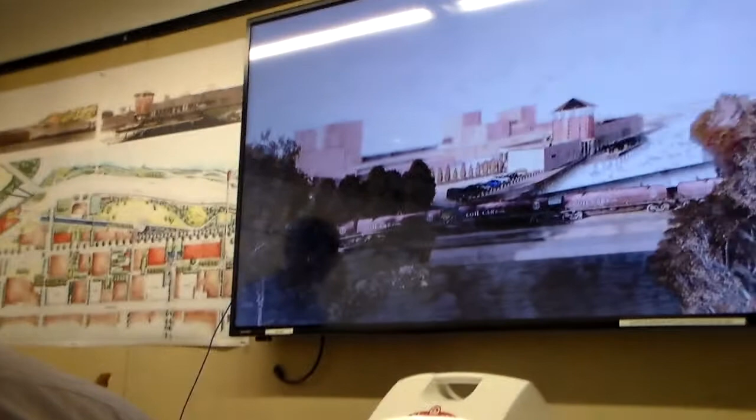I also wanted to take all of the information I had gathered by talking with brewery owners and visiting breweries, and I inquired about things like their spatial needs, their wants, and especially their regrets. I wanted to turn that into a program that would facilitate fluid operation.

I also have another driving factor, and that is the community of the brewing. If I had learned anything during all of my research trips to breweries, it is that the community comes out of its shell at breweries. So I wanted to design a space that allowed for active engagement for those that are visiting the brewery and also those that might just be passing through.

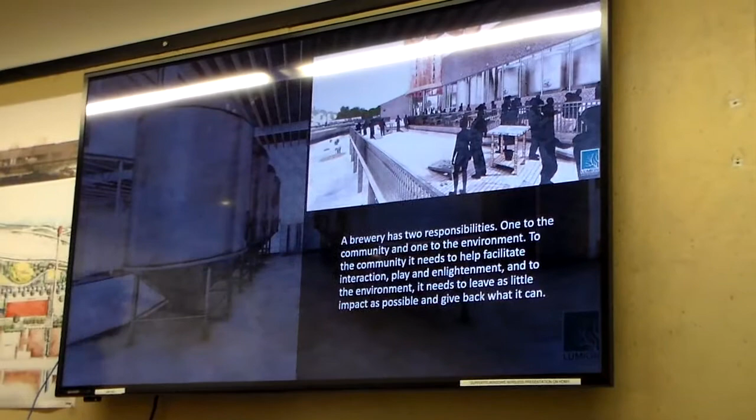To me, a brewery has 2 responsibilities. One is to the community and one is to the environment. To the community, it needs to help facilitate interaction, play, and enlightenment. And to the environment, it needs to leave as little impact as possible and give back what it can.

So a brewery is a destination, a point of interest. It's connected to the urban context of its surroundings. It's a perfect location to educate people on the intersection of agriculture, water, biology, and energy.

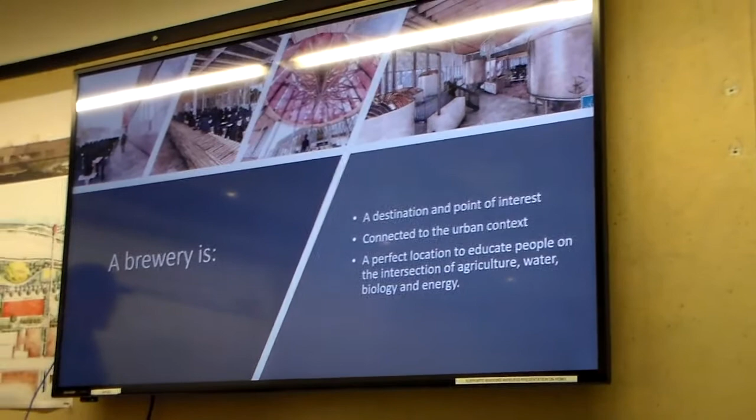Lynchburg, where my brewery is located, is up and coming. The waterfront is an extremely active place. The population is increasing in the area, the number of businesses are increasing in the area, and people are always looking for the new thing to keep them in the city a little bit longer.

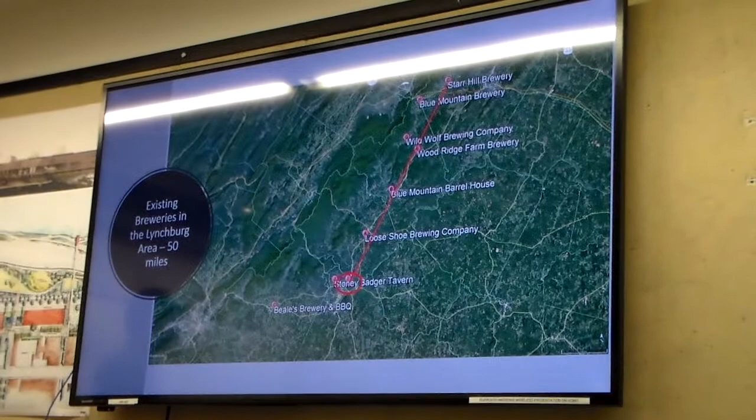Lynchburg right now has no breweries. The best breweries are about 35 to 40 miles away from Lynchburg, whereas an hour and 15 minutes away in Charlottesville, they have a 6.5 mile radius. So being a smaller city, with a residential area here and the downtown area there, my site in the red block is definitely prime for a brewery.

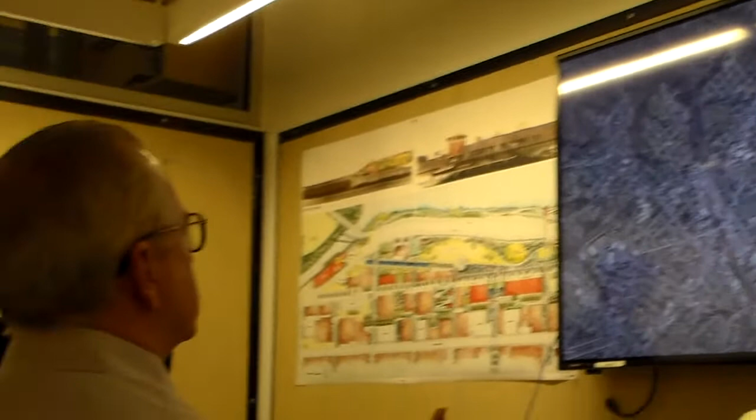And this is its downtown area as opposed to center city, just to show how walkable the city is. So my site is located in the northwest corner of Lynchburg.

It is at the very end of a larger master plan that is being developed right now, designed by Nelson Byrd Woltz. The master plan includes everything from 9th Street over. This is 9th Street, so this is the street you would take to get to the brewery. You can see that the master plan also includes the restoration of a lot of nearby buildings, all red brick, punched windows, being restored to their former glory.

This is one of the staples of the downtown area. This is the Depot Grill, and right now it is the only place that you can go for a decent selection of beers.

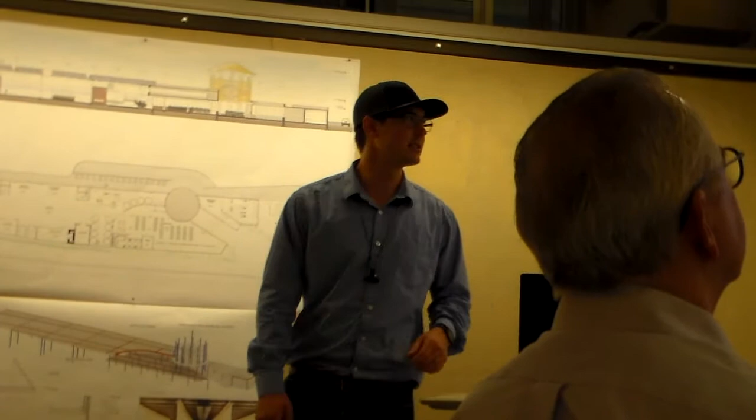So this is the master plan. As you can see, it's very similar. I added on to it with my brewery and the other portions of the city that they didn't include.

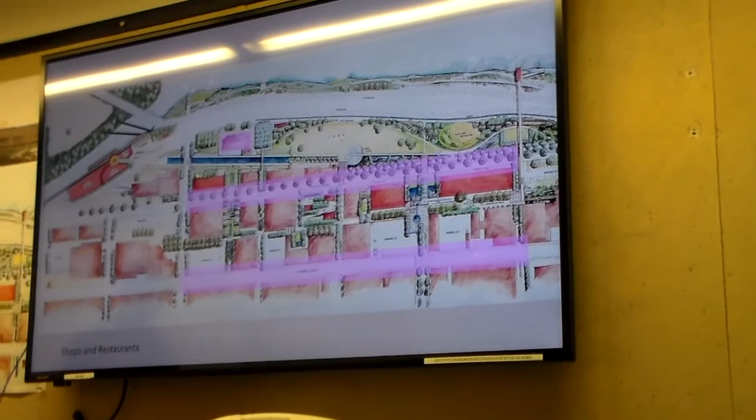Since the master plan has been implemented, right now Jefferson Street is loaded with shops, cafes, and restaurants. Same thing with Commerce Street, a lot of mom and pop shops and restaurants. The economic generation is seen through the amount of new businesses that are actually flooding into those areas.

Another major aspect of the new master plan are the trails. The trail along the top here on the site plan is an existing trail. It's really a walk, the James River Walk, and it goes down. There's an island over on the other side here that continues it.

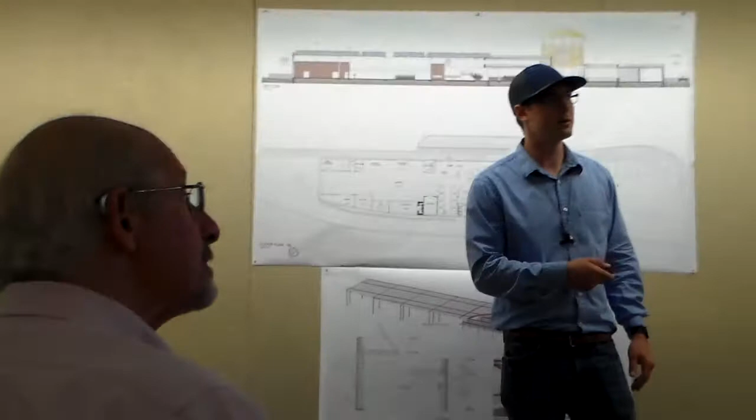But they added on to it, things like this sky bridge that I don't know if it'll be implemented or not, but they added the sky bridge, crossings and everything. What I wanted to do was continue that walk and merge the James River Trail along with the Blackwater Creek Trail, so my site becomes a conduit between those 2 trails. Instead of ending at Lynchburg, it allows you to continue on through and wrap around Lynchburg as well.

Then there's a lot of avenues that they're opening up with this master plan. It's a very hilly city, so these avenues have a lot of stairs, overlooks, the whole nine. It's really turned into something beautiful.

So I'm going to dive into the brewery. Given the language of the buildings in Lynchburg, with the red brick, very basic materials, punch windows, and stuff like that, I wanted to stick with and speak to the context of their materiality.

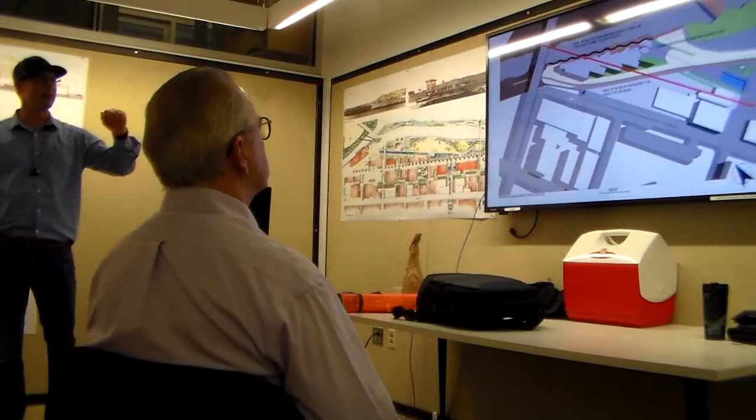And I have from the very beginning. This is a very early concept that I had. It is quite different from what you see today. Its main driving factors were, of course, that main run right here through this master plan, as well as the water's edge, giving it a little more organic shape on the water's edge side, and then a more geometric, in line with the city look on the front.

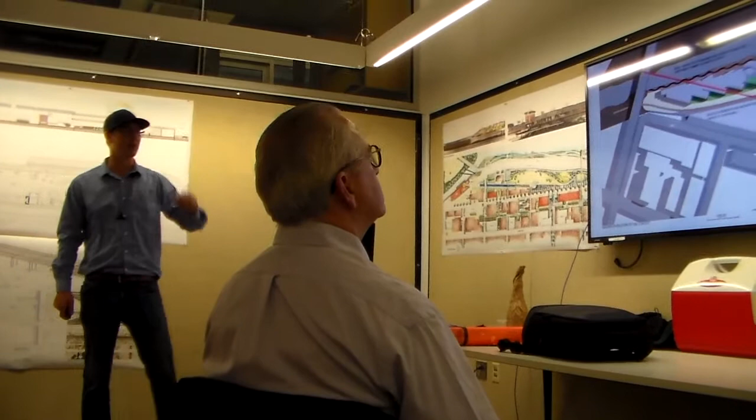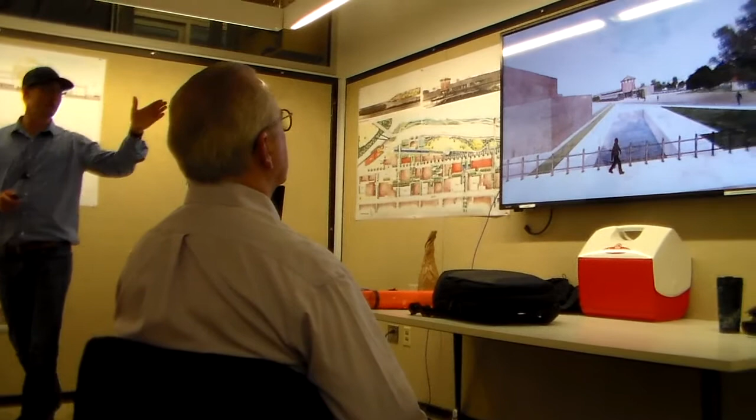And then it developed over the last quarter into what we see pretty much today, except for the terminus feature, which is completely changed. The program on the inside is exactly the same as last quarter, because I had figured it all out then, but the terminus as well as the site, how the site looks, is completely done this quarter. So this is the new look, looking across the canal, which is being built right now in Lynchburg, to the terminus as a point of destination.

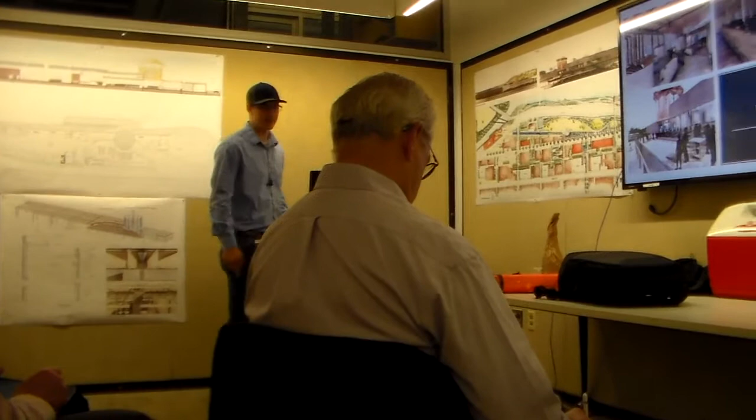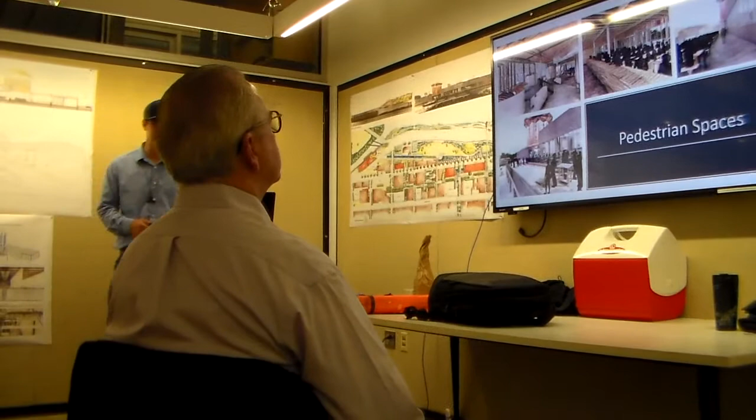So the pedestrian spaces were designed to encourage conversation and activity. There are plenty of places to sit, stand, play, and get used to the surrounding area, all while sipping on some beers. The palette of the interior space is warm, industrial, and I wanted to incorporate some interesting structural elements with the red built trusses.

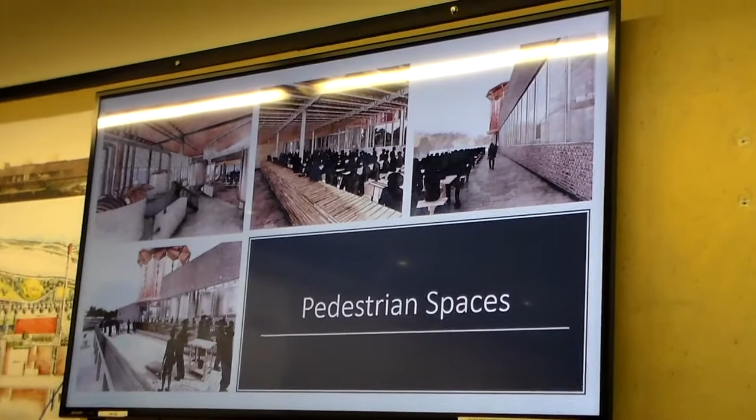The exterior is designed to have clean lines that match the facade of the building, and I wanted it to have a consistent connection to the waterfront. I simplified the amount of colors to allow the terminus to stand out on the exterior and allow the brewing process, or the brewing system, to stand out on the interior. Those are the main points of interest while visiting this place, along with the amenities.

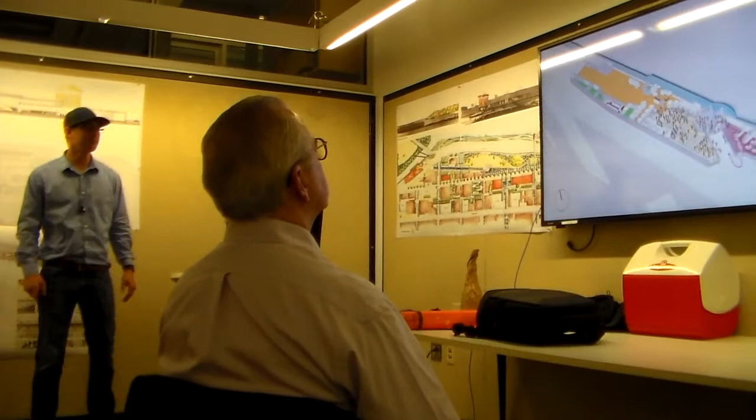So, the interior of the complex is broken up into 6 different parts. There are pedestrian areas, the restaurant, the brewery, and then the spaces that support the restaurant and the brewery. The flow into and out of the brewery encourages people to explore.

After entering, a person is already at the halfway line of the tap room, as you can see there. And that allows them to either go check out the brewing system, which is what I would do, or they can go over to the bar and grab a beer. But it gives them basically free flow throughout the tap room.

Upon exiting the tap room, the person is looking directly at the restaurant doors, which I predict will invite them to grab a bite to eat. Having the brewery and the restaurant separated was a completely conscious choice of mine.

Really what I wanted to do was make the restaurant feel like a permanent food truck. They could have things like guest chefs. It can close when it gets late and the brewery wants to remain open. They can offer options to people that do not drink beer. And I feel that's why food trucks really do so well at breweries right now, and why breweries incorporate food trucks during their events. The terminus area was designed to give unfettered access to the waterfront amenities.

The seating, the trail connection, and during operational hours, the games. I wanted the brewery to really feel like a full extension of the implemented master plan. So I worked out the occupancy and the parking of the entire complex, and the tap room. We're able to support 330 people, with the brewery 140. And I note that because that means that the brewery can be used as a flex space for private events.

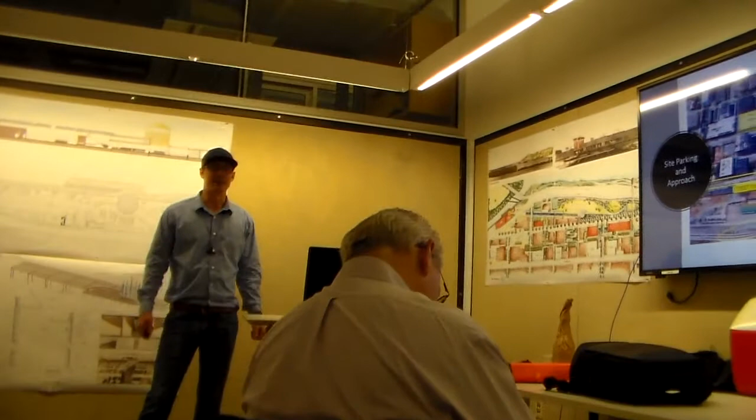Parking requirements were a little steep, 136 parking spots, but I'm not worried about that because in this figurative project, I got the okay from Lynchburg zoning to do shared parking throughout the site. There are a couple of main parking garages that are very, very close to the site, as well as a shared parking down along the railroad tracks between the Depot Grill and the Children's Museum, which is right here.

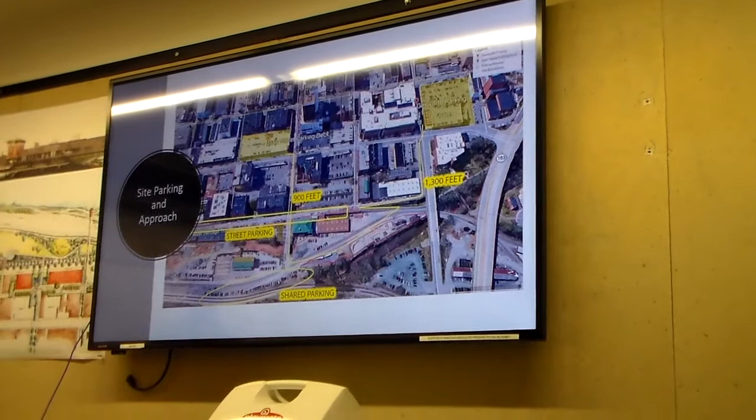Inside the brewery, there are a lot of functions. We have things like the drop-off, handicap parking on site. There's an access route that goes along here to the back loading area. That is where the unmilled grain storage would be, where you would store your base malts, as well as a place for the spent grain to go, so that way farmers can go up, dump the spent grain into the back of a truck, and drive away and go feed it to their cattle or their livestock.

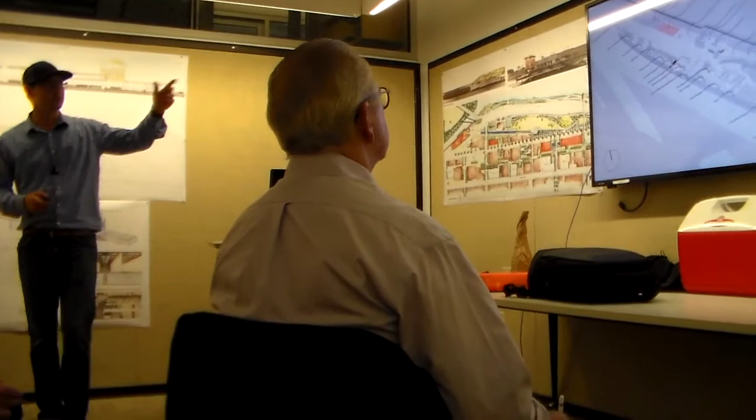The brewery has all of the things that anyone could ever want in a brewery, to be honest with you. Storage, a mill room, yeast lab, prep kitchen. Put the prep kitchen in there so that way when you're getting ready to prep 500 pounds of raspberries for a heavily adjunct beer, you can do it right there in the brewery. It's got a cold room for the draft lines, fermentation row with 8 fermenters, bright tanks, hot and cold water storage, as well as a reverse osmosis system.

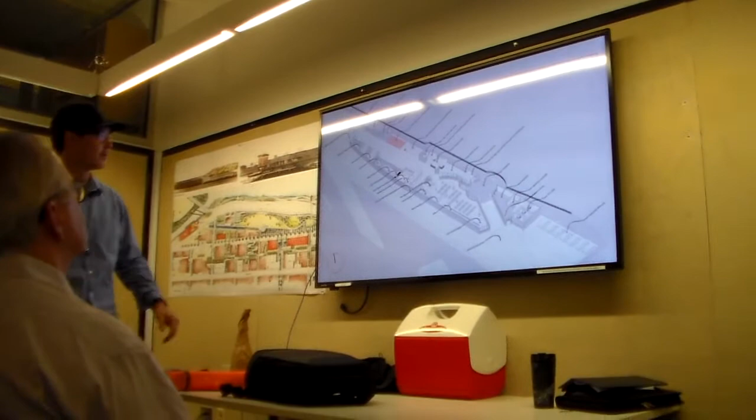We have the brew house over on the side here. We have more holding vessels, a well and pump room. I separated it so that way during crisis it could actually drain just in there and it won't flood the entire brewery. Kegging and bottling line, as well as a storage area for that. And if anyone's ever been to Double Nickel Brewery and done their tour, you can see just how much room cans actually take up in a brewery. Locker room and shower, because it's a messy process. And then we've got the solar electrical storage room, as well as the electrical room.

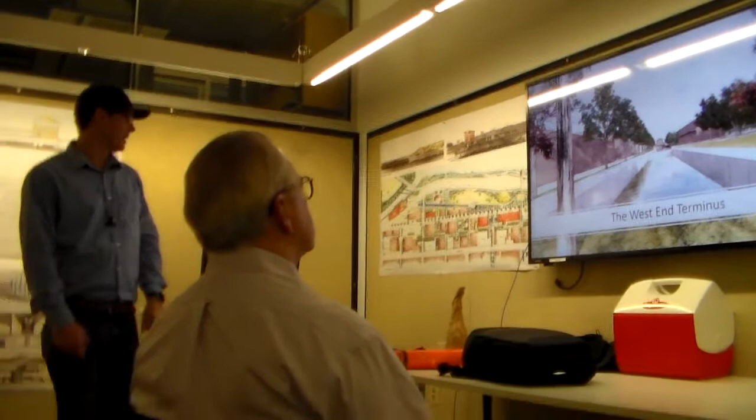Speaking on the terminus, I'm going to deem it the West End terminus because it's on the northwestern side of the site.

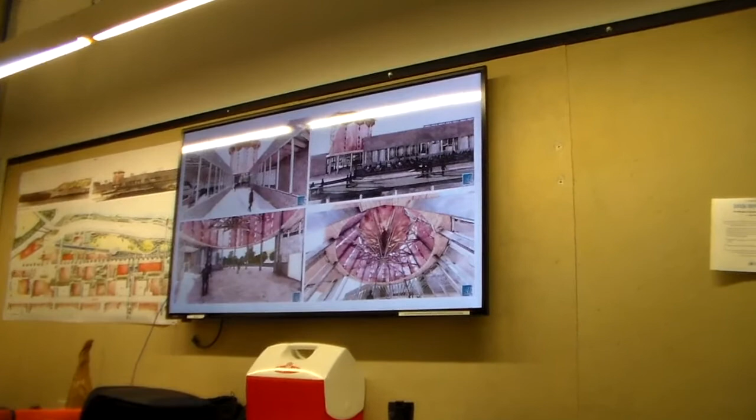I went through many different iterations, as Bob can attest to, and I landed on this design right here. This design incorporates copper-colored aluminum panels in the shape of the petals on a hop cone. It's a little tongue-in-cheek, but the way I organized it, it doesn't really smack you over the head with a hop cone.

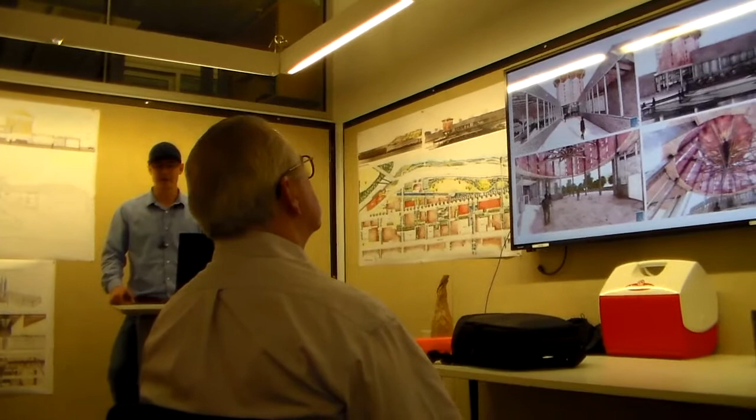The canopy is also a metal panel, made to look like a stretched fabric canopy, and it is copper colored. The whole idea of this canopy is that it can be used during tours as a narrative for the brewing process.

The copper can then spark conversation about the vessels that were used throughout history. The panel shape can then be used to talk about the hops, which are basically the core ingredient for the flavoring of beers. It also happens to be the core of the brewery and the restaurant itself.

The wood on the interior is arranged to look like the spindles inside the hop cone, so it's a little more organic look. And then you also have the water on the exterior that can talk about the importance of the water in the process.

The other major feature of the terminus is that it provides cover between the brewery and the restaurant for free flow during unopportune conditions outside.

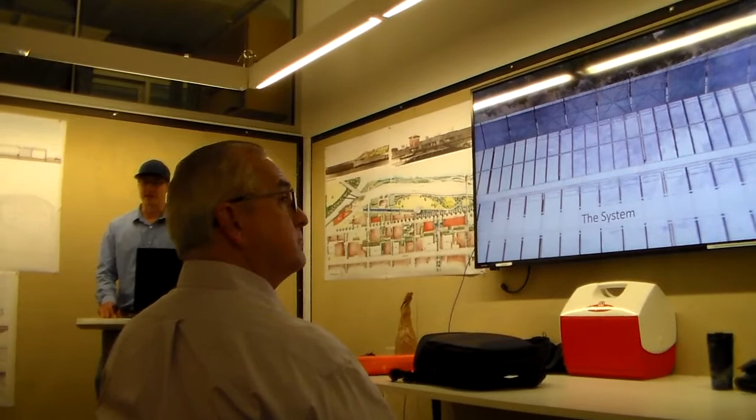Now I'm going to get into the system, which is arguably the other half of this project. I know I'm graduating from architecture school, but I have a true affinity for systems, specifically the brewing systems. I know the brewing process like the back of my hand, and I have for years. For this building, I thought it was critical to understand it in an architectural and systematic method, paying attention to the systems housed within the building.

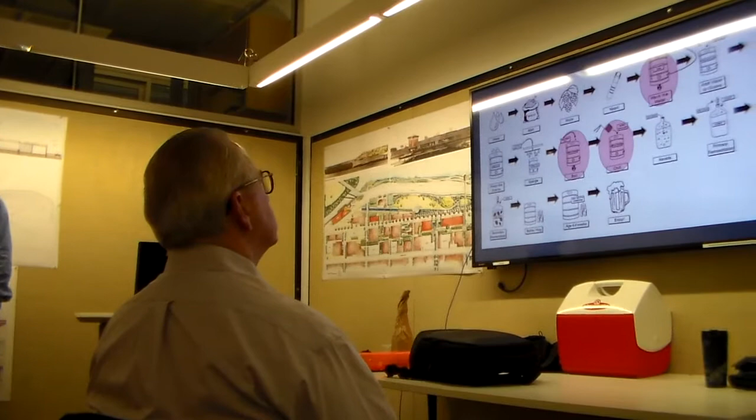So who knows how to brew beer? You don't count. Oh, here we go, we got one.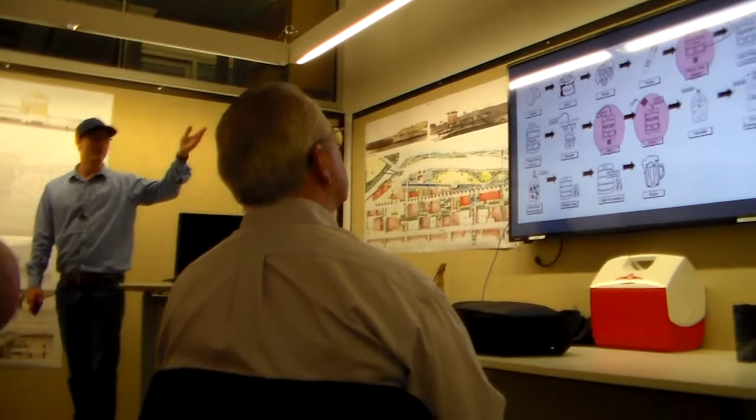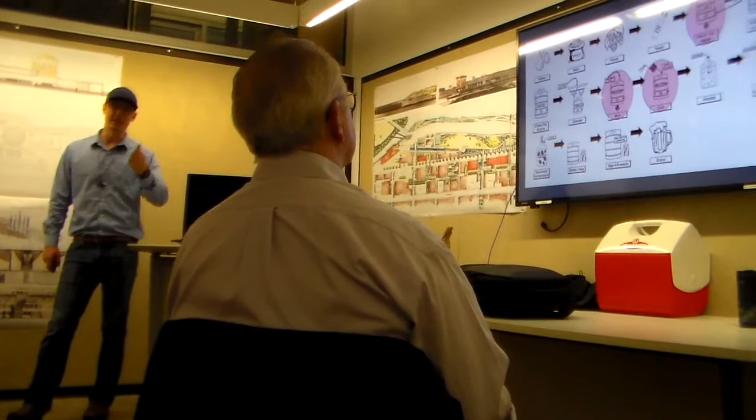You can attest that the major wastes of energy are heating up your strike water, heating up your boil kettle, and then your major draw of energy is during the chilling process, because now you're taking fully clean water, heating it up in a non-contact way, and you're able to siphon off and harvest the energy that's been transferred to that clean water.

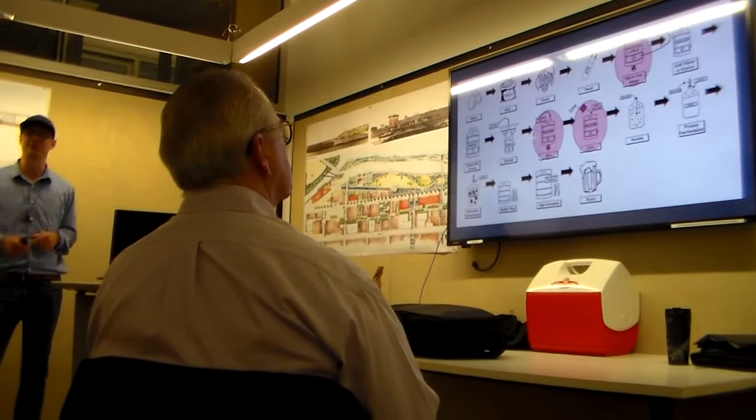The brewing process, for those who don't know it, is a combination of water, malt, hops, and yeast. You put the malt into a bucket, put hot water in that bucket, steep it for an hour, run hot water over it, boil it for an hour, then chill it.

During the chilling process is when you drop all those proteins that are still in solution down to the bottom, add a little oxygen, add some yeast, and then you bottle it. That's the super quick version.

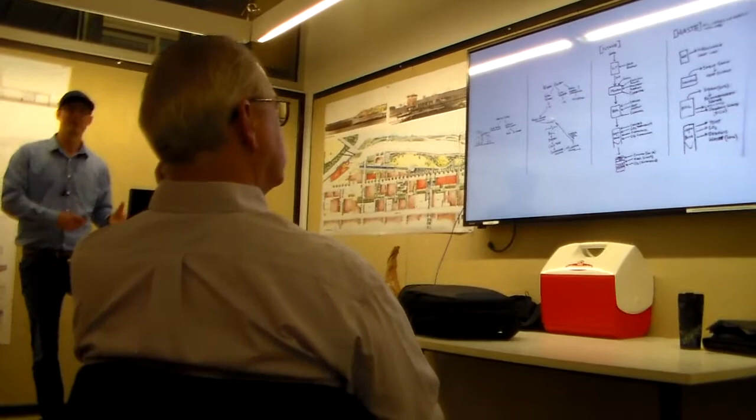But it is what I needed to be able to do these diagrams that got me to where I am today. This was looking at a lot of the energy that goes in, what I get out of it, and what is actually being wasted.

That way I can see the supply chain in its full context. This is what I came up with after also researching the temperature and precipitation and finding out that Lynchburg is able to harvest peak performance from solar panels 82% of the year.

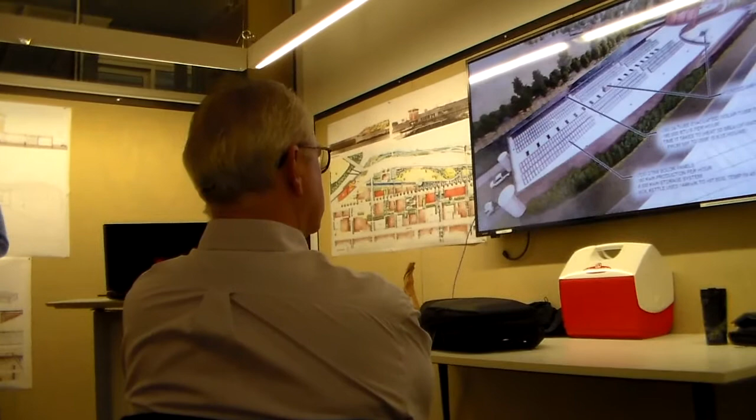The one thing inside the brewery that uses the most energy is the boil kettle, and it uses 144 kilowatts to hit boil temperature in 45 minutes.

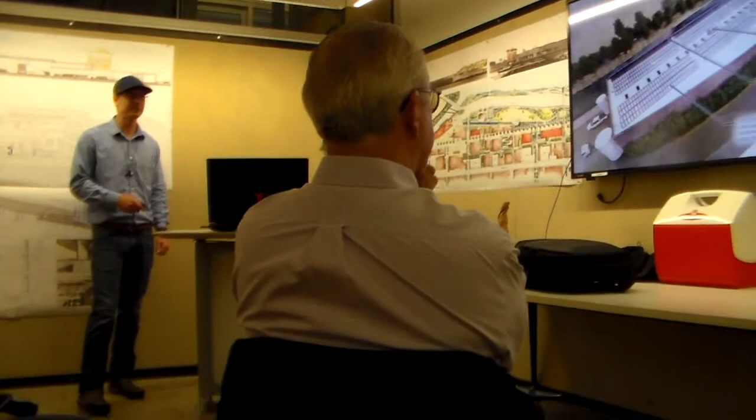That means it would take an hour and 45 minutes for the boil to finish, meaning it may have to rely on the storage power inside the brewery. But that's the only time—105 minutes out of the day, every other day, that you're actually going to need that kind of peak performance.

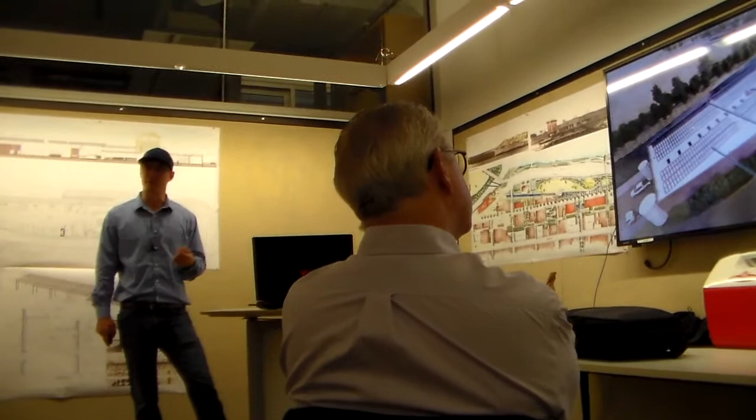The other thing that I used were evacuated solar tubes. Evacuated solar tubes are really cool. They take a 90th of a gallon of water, pump it through a tube, and heat it up using solar energy. It's able to go from 55 degrees to 200 degrees in a single pass.

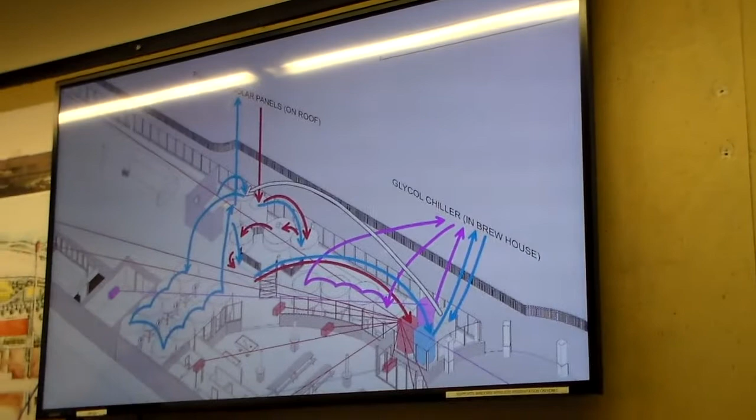Which means I can take well water, shove it up to the roof, pull it back down, and store it into a hot liquor tank. So we go up to the roof, when we come back down, it's able to be stored in here.

There's a mixture of cold and hot water in order to reach what's called strike temperature, usually around 170 degrees. That water is then put onto the mash tun and on top of the grains. That is then moved over to the boil kettle, boiled.

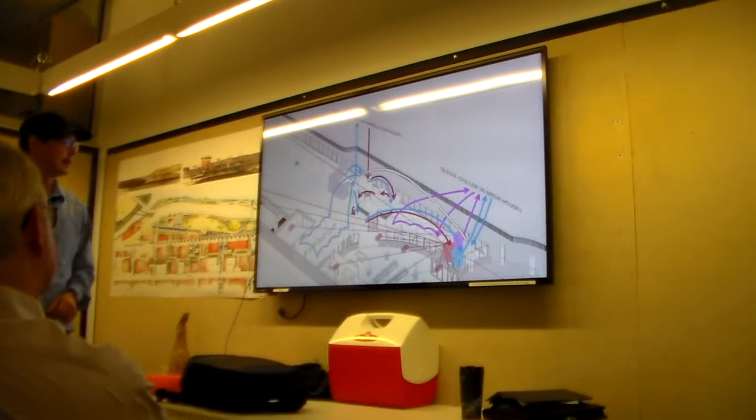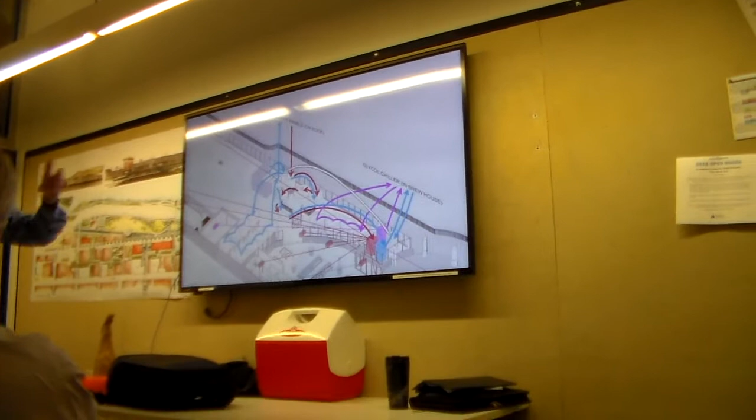That hot water is then put into a heat exchanger. The heat exchanger is pulling cold water from the well water, and it is at that point that I would have solenoids with temp probes that would be able to take all the water to about 120 degrees. So when it first comes out, it's going to be about 180 degrees, then eventually it'll start to cool down because you're chilling the entire beer.

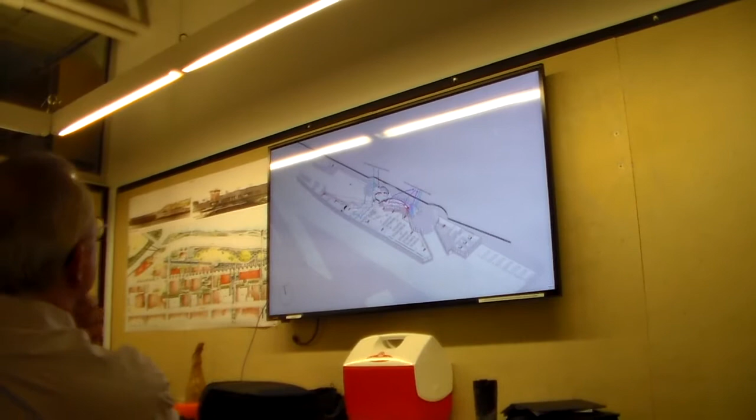So all the hot water will go into the red tank. All the cold water below that 120 degrees will go into the cool tank. That water will then be used to go to heat exchanger HVAC units, so that way we can utilize the energy that's already been put into the water and reduce the energy necessary to heat the place as well as cool the place over time.

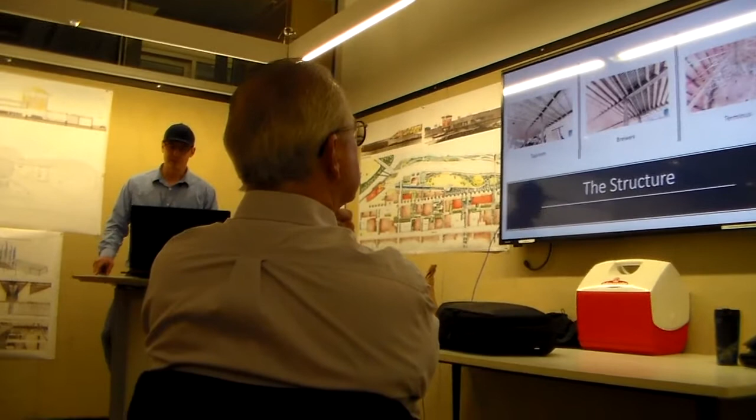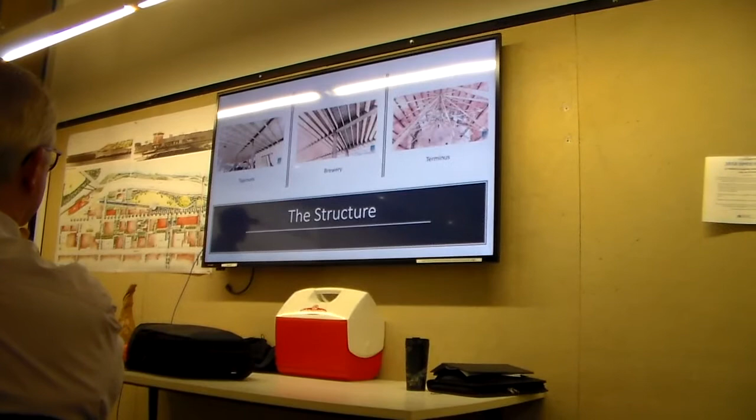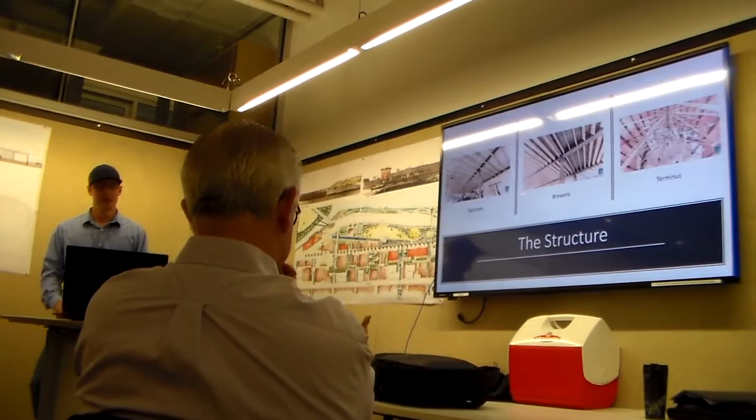So the structure of the building, I wanted it to be cohesive with material and the language. Needed it to be industrial. The industrial look in breweries is extremely popular these days, but it also allows for a lot of modification. The horizontals are mainly wood, and the verticals are all metal columns.

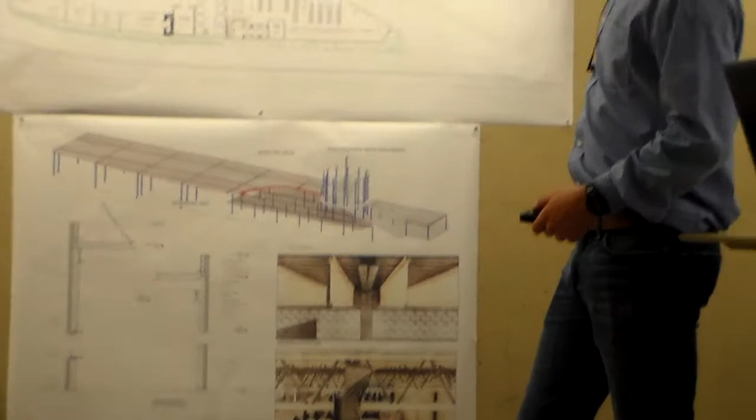So we look at the structure here. You can see that I have an array set 25 feet apart, and it moves through the entire building. The tap room is a slightly lower level. We have its parapet at 19.3, so the top of the room in here is about 15 feet.

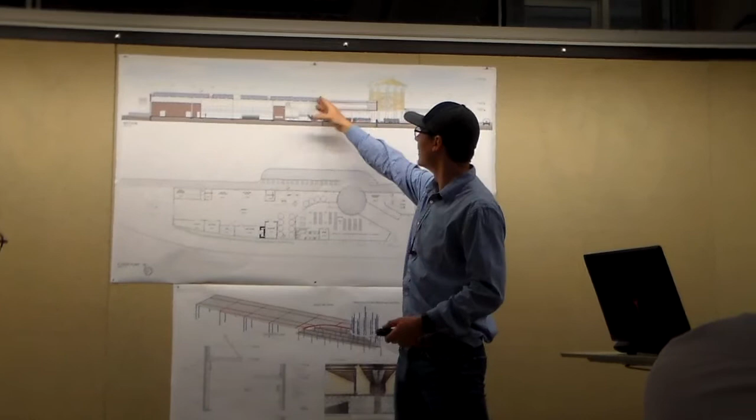We move up and allow clerestory windows to help penetrate light into the brewery. This is the area of the building that would get the most light, the most reflected light. But I also have a canopy that covers that, so that way it doesn't get direct sunlight. We are trying to remain somewhat sustainable.

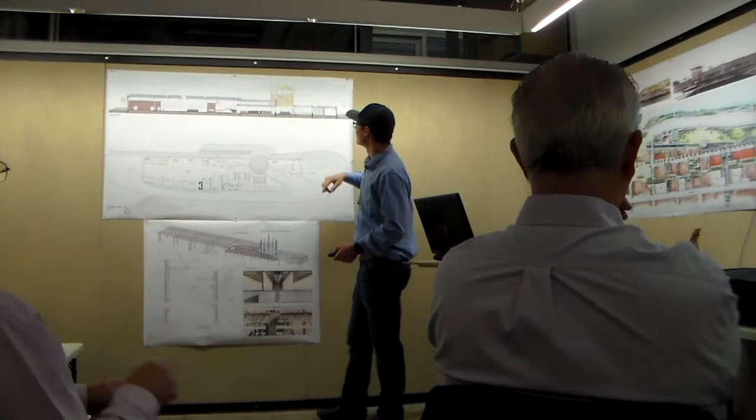The columns that are in the terminus go all the way up to 61 feet, the top column does anyways. And they have an angle, again, to make it look like it's stretching the canopy out like a piece of fabric.

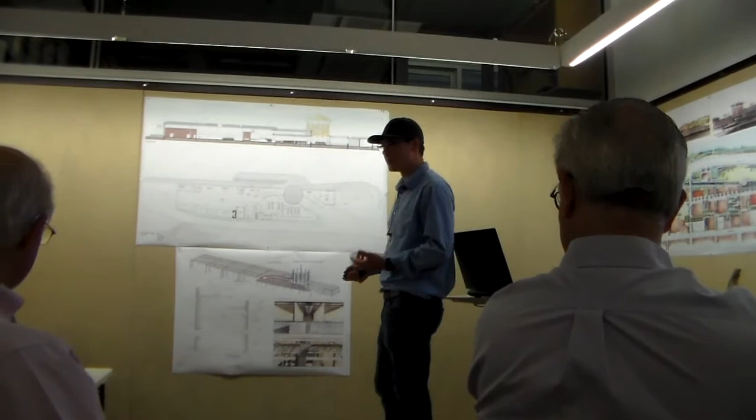I added in everything that we had talked about last quarter. So we've got a vented overhang that protects those clerestory windows, and then everything else is from the interior. So we have brick veneer on the exterior here. On the inside we have our thermal layer, and I did a lot of research on how to support a storefront system inside of a brick wall, especially if you're going to top it with brick.

So I've got things like the lateral stabilizer installed in the wall section as well. And then the roof is heavily insulated and also quite supported by these RedBuilt beams that go across, because it has to support that entire solar system.

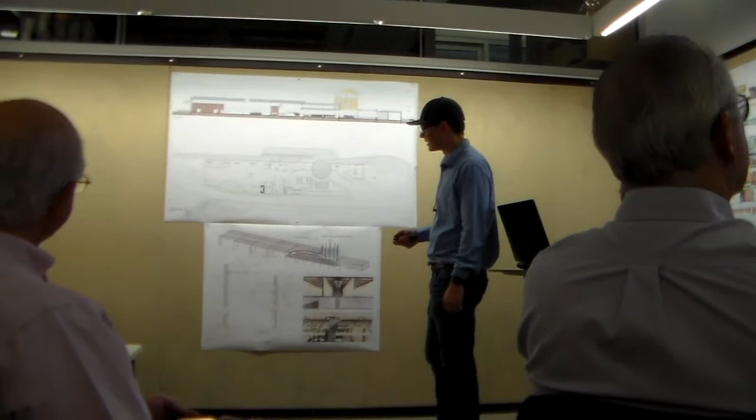In the brewery, the RedBuilt trusses have an option of coming with longer top chords. So what I did was I had the top chord actually protrude through the wall 3 feet, so that way on the exterior what you're seeing is this cascade of shadow lines that change all throughout the day, just to reveal the structure a little bit on the exterior of the building.

At night there would be appropriate accent lighting, accenting the terminus so that way it can still be seen anywhere on that master plan, and then down lights underneath every other protruding top chord and the interior, of course. But Lynchburg's a very well-lit city, again, very walkable even at nighttime, and so this would be an incredibly popular location there.

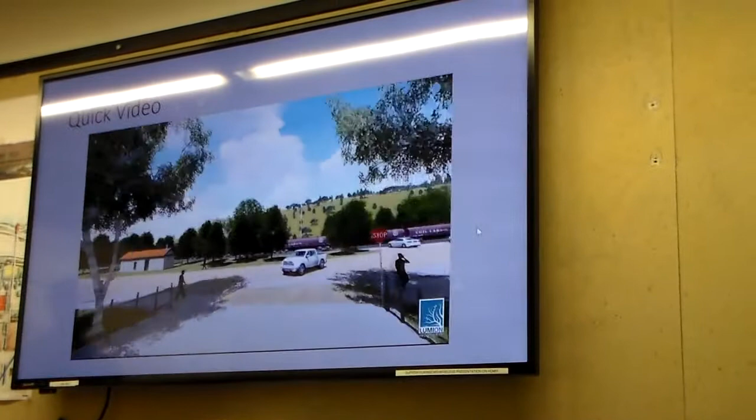I have one more thing, and it is a quick video, and I'm going to just let it play. This is to give a better sense of the surrounding context, where it is on the site, what matters in Lynchburg, and how the complex works together.

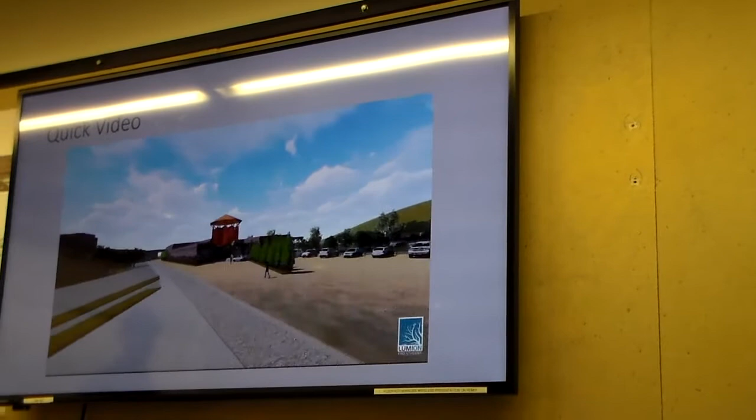I didn't think it would be appropriate to do music.

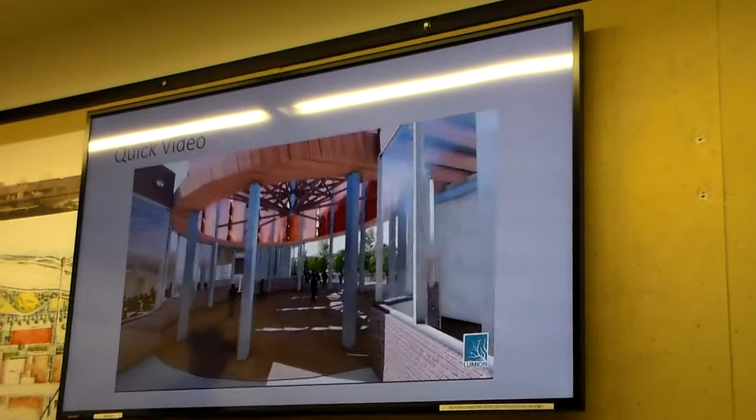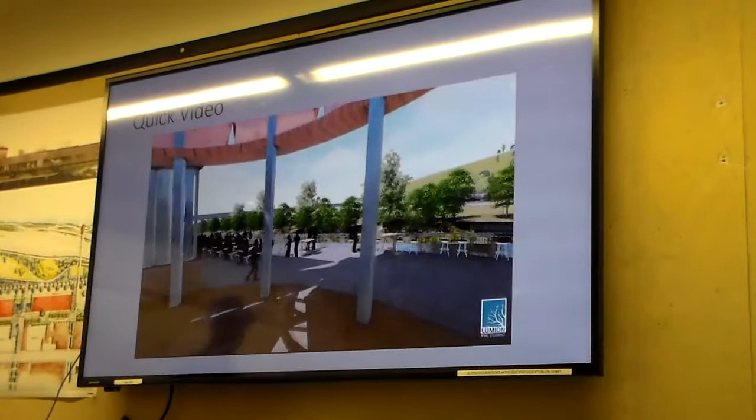So when you get in, of course, it would be something that you would look up at. And then you hit your head on a beam. Column.

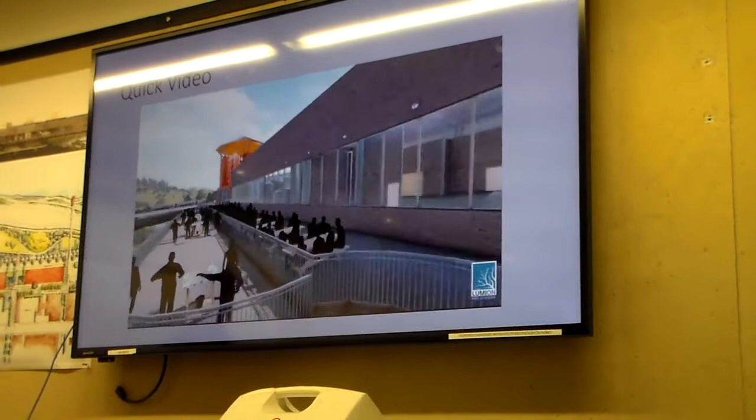Outdoor, there would be a cornhole area or a game area, partial cornhole. Plenty of places to sit, all along the water's edge of Blackwater Creek.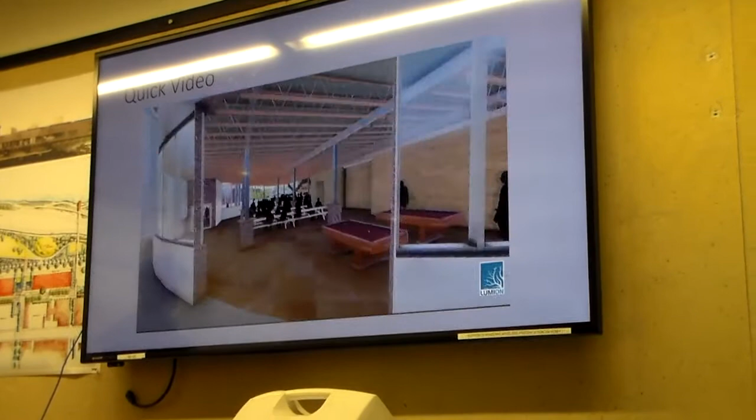Inside the brewery, you have the pump room, the brew house, the fermenters to the right, bright tanks to the left, billiards, more places to sit, merch room over on the corner.

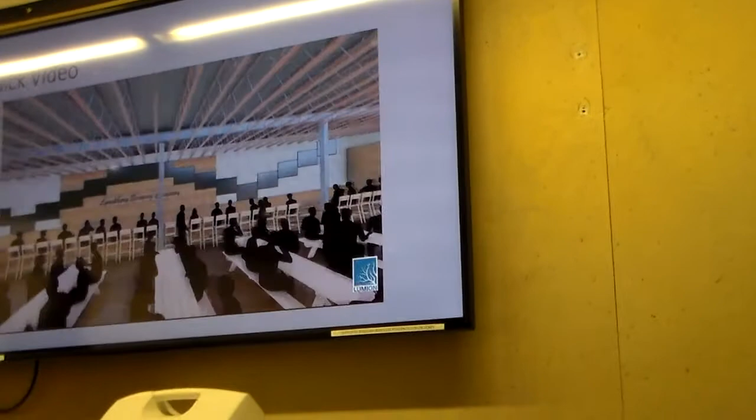You can stand around each of the columns. There's a drink tray there. And then exiting, you would look back in line with the master plan.

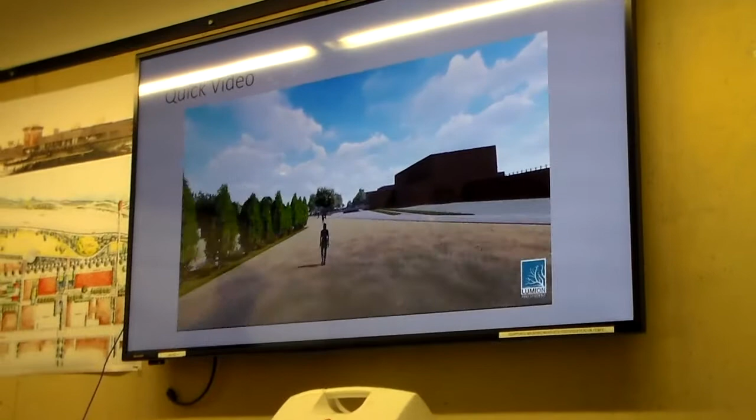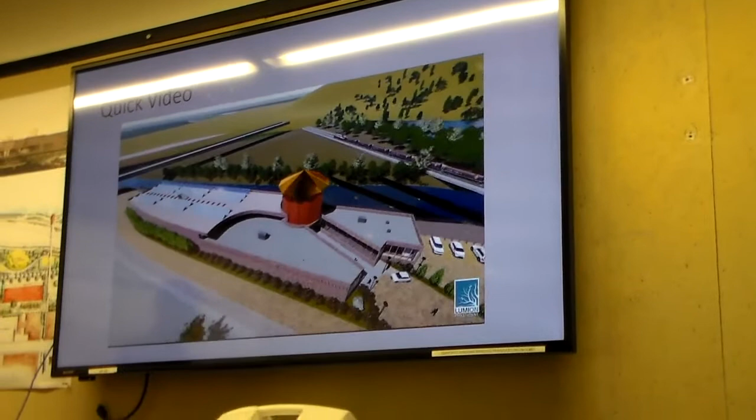And again, the entire thing is powered by those 720 solar panels and those Tesla power packs inside of the electrical storage room.

Back service ramp, again, where the farmers would back up to the spent grain silo so that way they can pull that for the livestock.